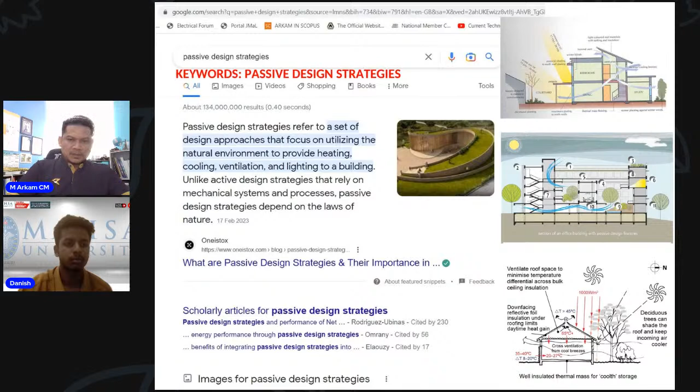So the keyword we want to talk about today is passive design strategies, and some of the pictures I've taken from Google search or Google Images are on the right hand side. I'll try to explain a little bit about passive design strategies so we understand what it's all about, in terms of building construction or building services, in our country and our climate especially.

And of course we talk about why first - why we want to go for passive design strategies. So passive design buildings use a lot of strategies to maximize energy efficiency. That is our main aim regarding passive design in terms of building, to maintain human comfort. So we'll talk about human comfort and how we want to use the nearest environment to the building to optimize the energy efficiency. That is the basic idea.

The key to the strategy is to maximize the energy that is gained and minimize the energy that is lost. So we want to maximize whatever useful energy comes from the immediate environment. When we talk about the immediate environment, we know the building - we have the building envelope.

Building envelope is actually the skin of the buildings. We talk about walls, we talk about roof. Walls and roof is considered as building envelope. So whatever is outside the envelope, we consider as the nearest environment. That nearest environment sometimes, and most of the time actually, has a lot of opportunity for us to maximize whatever can be beneficial for us inside the building. At the same time, we want to minimize the loss.

Bear in mind that in our climate in Malaysia, or tropical climate, we are blessed with a lot of sun radiation or solar radiation. We have been constructing buildings considering how the solar radiation and solar illuminance can be very useful for us inside the building. So it can be also part of the consideration.

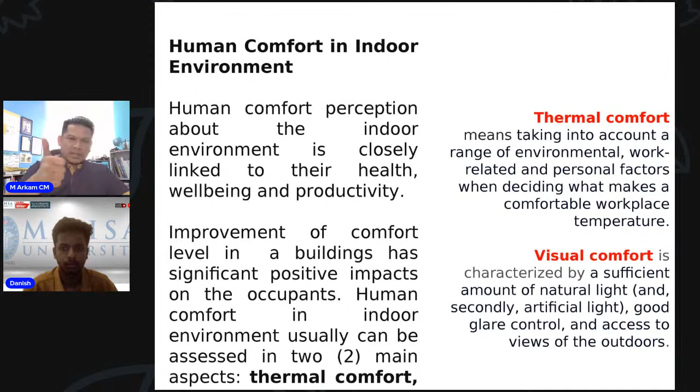Basically, sun is the main factor here. When talking about human comfort for indoor environment, sun plays a very important role for us to utilize whatever is useful from the outside environment, such as useful light and useful temperature, to be brought inside the building. This is quite complicated, but it's very true.

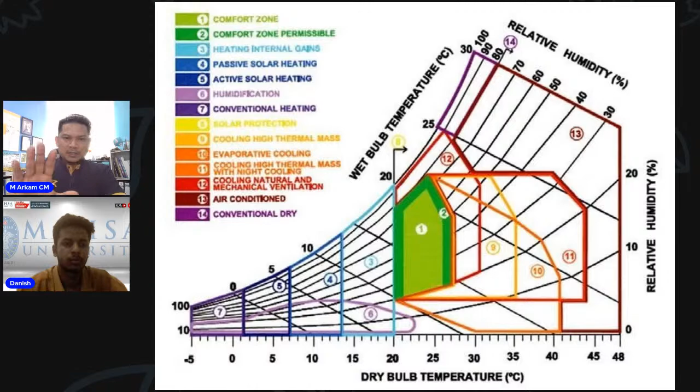So we're talking about zone one - that is the aim of every design, building, or place you want to go for, number one in terms of comfort zone and comfort level. Many scholars have researched to come up with this chart to help us understand the comfort level we're talking about regarding thermal comfort.

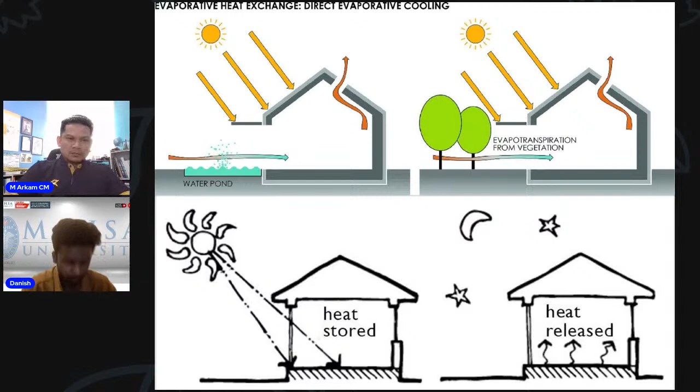But something needs to be done to improve this, in terms of maybe insulation, maybe passive design strategies, to prevent the heat stored in our building materials, and we need to choose our building materials with specifications so they don't absorb the heat to be released back during the night.

So one of the advantages of having vegetation at the right positioning, because we need to understand the sun path as well. So we'll talk about sun path later in this presentation today.

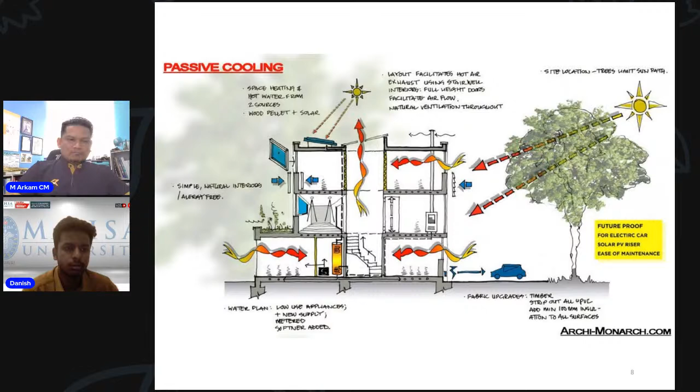So this also needs to be protected. You can go for, for example, tinted glass. Maybe you can go for other things, blinds or whatever can minimize the impact of the solar glare. But you need the useful light. So, for example, at my back here, there's actually a window. So my working space is quite bright. I don't have to switch on my lamp to use the space over here.

So what we need to do is actually to differentiate, just take the useful light, because light also comes with heat. So we need to understand how to remove the heat from the useful light so that the useful light will be here and the heat will stay outside. We don't bring the heat in. That can be done by a few passive building strategies as well.

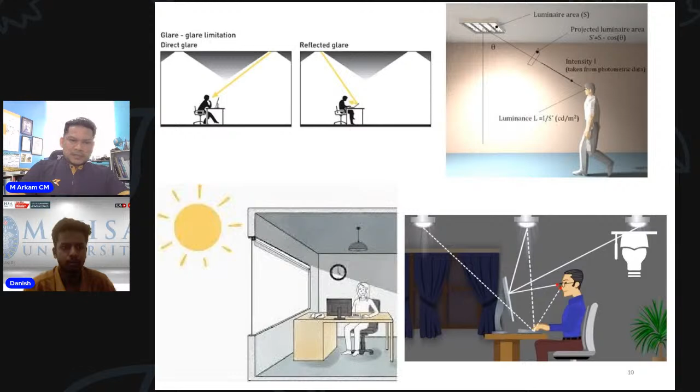They want to go for visual comfort, either using the sun or using artificial lights. Okay, in the book again, the recommendations for good practice in renewable energy application are classified under the following areas. So we want to maximize passive solar design. We want to design our building passively and maximize it, and we can do this through this standard.

Secondly, to optimize passive cooling strategies. So solar design must be maximized, and we optimize passive cooling strategies on how we want to cool our indoor environment by using less energy, especially electrical energy. Optimizing environmental cooling, such as vegetation, site planning, landscaping, and also shading. It can be done by optimizing environmental cooling from trees and vegetation, or how you plan your site, or by putting in landscape or shade.

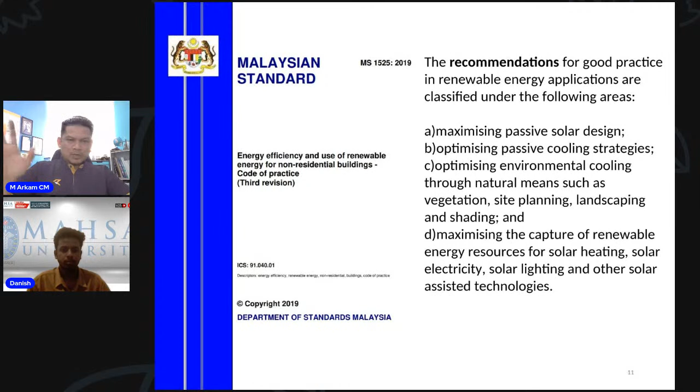So this is all about passive strategies, where a passive strategy in general doesn't need any mechanical or electrical effort to make it work. It can be one of the strategies we implement from the beginning when we construct the building. Maximize the capture of renewable energy. We won't talk about renewable energy today, such as solar heating, solar electricity, solar lighting and whatnot, because it is another topic for this webinar.

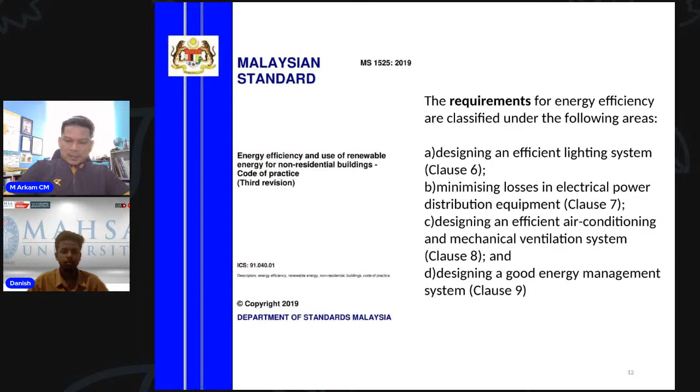Okay, then the requirements. Energy efficiency is classified under the following areas: design an efficient lighting system, which is about artificial light; minimize loss in electrical power, which we won't talk about either; design efficient air conditioning and mechanical ventilation; and design a good energy management system, which is more complicated. We want to integrate everything inside the building using an energy management system, which is available in the market now, but it's more complicated for us. We just want to talk about the sustainable design approach today.

So when we talk about architectural and passive design strategies, we want to design within the contextual climate. Contextual climate refers to your position. We need to understand our position here in Malaysia, equatorial, Kuala Lumpur, for example. It's a very specific area. And the site is the first step to optimize the benefit. So first, we need to understand our own climate here in our location. When we want to construct our own space or buildings, this becomes the main important thing: where is your contextual climate?

Provided by the specific environment. Specific environment here means, of course, vegetated areas; a lot of trees will make it different. Building a house in the woods will be different from building a house in the concrete woods, for example. Design solutions shall strive to achieve energy efficiency and use environmentally friendly materials of high quality and durability in order to decrease waste, meaning energy waste. This second paragraph is important.

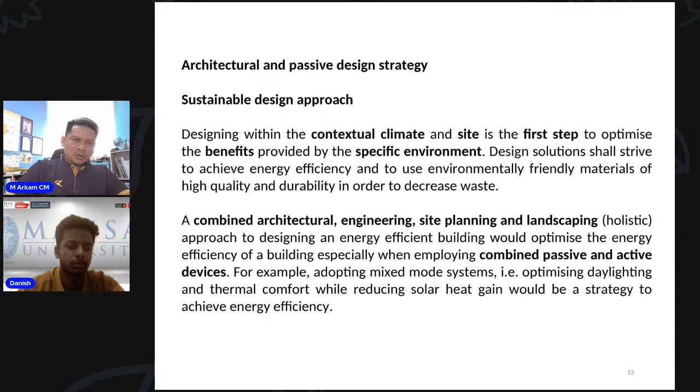The specific passive design strategies can be done by understanding the combination of those to be adopted in our project or building. Okay, this is too long. I'll go straight to points A to G there. For architectural passive design considerations, we need to consider the following. The first one, site planning and orientation.

How we want to plan the position of our building, if possible. If possible, if you want to construct a new building, of course, you have that luxury. If it's an existing building, you cannot do any other orientation; it's actually fixed there. But something can be improved or can be adopted: daylighting, facade design, natural ventilation, thermal insulation, strategic landscape, and RE, renewable energy, if possible. But again, I will not talk about the RE now.

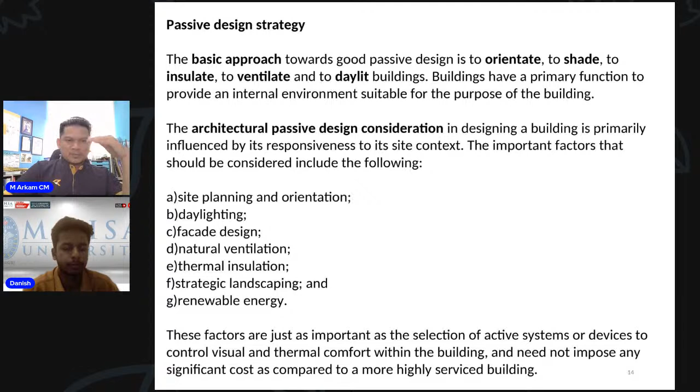These factors are just important, the selection of active system or devices. So we want to select the active system of devices to control visual and thermal comfort we were just talking about, and need not impose any significant cost compared to more highly serviced buildings. So A to F is very important for passive design. We talked about site planning up to the strategic landscaping just now.

Okay, this one is very, very important. Sun path in our area. Latitude 3.2 degree north, longitude 101.7 degree east. So this is actually the sun path where the sun is coming from the east. So it's north, east, west, and also south. Oh, sorry. Start from January. January, February, March, April, May, June, July, going to this direction. July, August, September, October, November, December.

So our sun is actually not coming from the exact same point every day. We need to know this very, very well. That is why our shadow is different based on the sun positioning, and the sun positioning is fixed through this kind of path. So coming from, for example, January here, go to here.

This is the way. Can you see my cursor, Danish? You can see my cursor, huh? Sir, I cannot see your cursor, sir. Can you see the cursor? So just the bottom one, the January one. I'm not sure how to help you on this. Let me see. How to put my cursor there? I cannot. Just to this January, 1st January in the bottom right there. Okay, right there, sir.

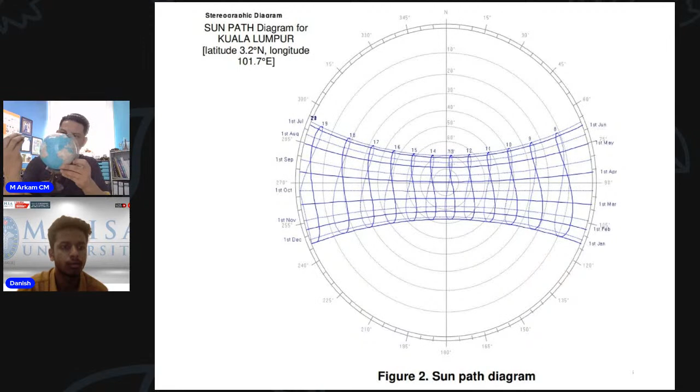Oh yeah, I got something to show you. I got my globe in my office. Okay, here. So the sun positioning is actually not here. It's something like coming from here, and then it comes a little bit up, and coming back. So then it can be low again, up and down, up and down. So it actually happens in our climate, in tropical climate. We are at the equator, so our sun is just on top of our sky. So that is where we can find our equinox, 2 times per year.

So that is where we can find equinox, where the sun is precisely on top here. Center of the cross. You can see the cross on that globe. So the cross will be our exact point where the equinox happened. And the equinox happened last month. That is why we were talking about heat stroke the last few days, and there is no more heat stroke coming because the season is over now. It comes back somewhere in September. So there is no point to talk about heat stroke anymore, because it's overtaken by events. But it's very important to understand how it can affect our lifestyle as well.

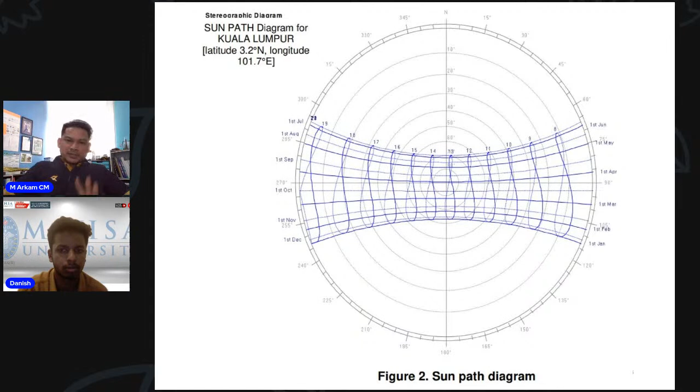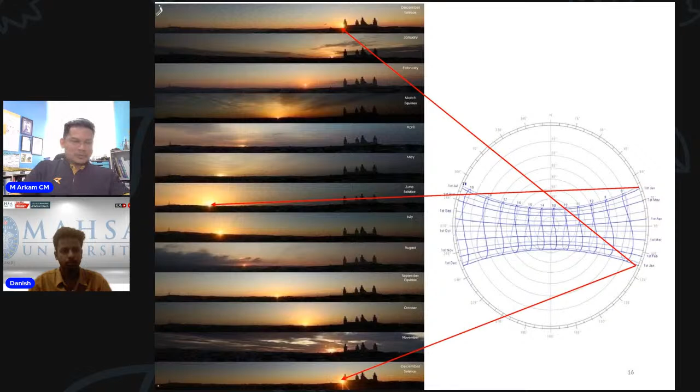We don't notice. Except if you like this topic, you will somehow notice lah. But you don't care. We don't notice actually. It's actually a blessed day for us to get everyday sun. Up to now lah, we don't have that.

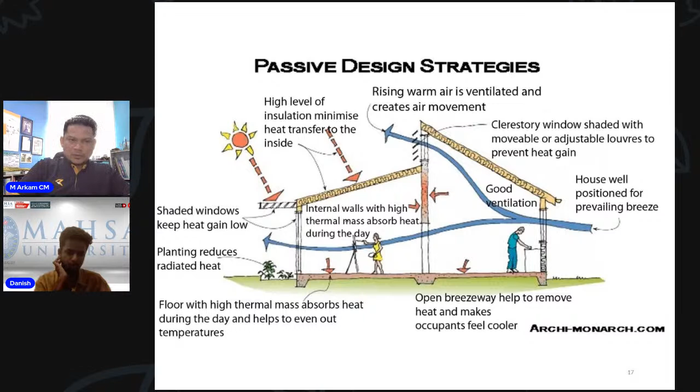And the top right there, we have January. Sorry, not January, June, where the sun is positioning far to the northeast. So far to the southeast and northeast. So all east lah, but north or south only. So this is how the positioning of the sun was created by our creator. And the passive design strategy, again talking about good ventilation and the sun movement, you know how to utilize the sun positioning for your building requirement. So we go fast, about 17 slides just now.

Okay, so we talk about local Malaysia. This is our sun path. But when we want to go to other countries, for example New Zealand over here, the sun path is different. The sun path is on the north side. They can see the sun on the north side. Meanwhile, in the UK, we can see the sun on the south side. So they don't have it above our position.

So that is why in the northern hemisphere, in the UK and Europe, all solar panels face 60 degrees to the south. And that is the most common reference that we had in the book before we started our own project on solar power plants. 60 degrees to the south, because we are referring to the UK. They're facing south because the sun is positioned to the south. In the southern hemisphere, for example in New Zealand, the sun is positioned in the north, so they're facing 60 degrees to the north.

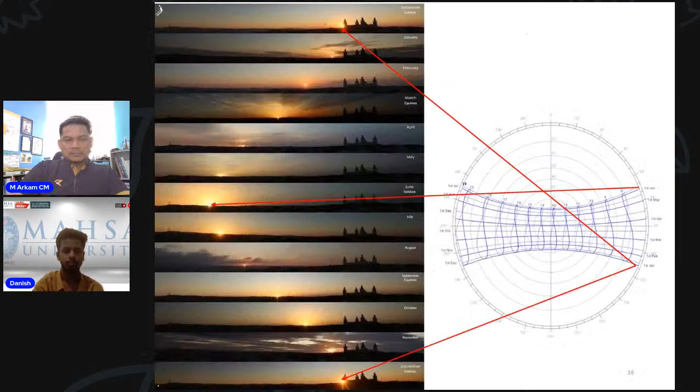So it's more appropriate for you to design according to the position of the building where you want to construct. So this is the fundamental concept when we talk about site planning and also building orientation. So this is much related. When we understand this, we can do our own building orientation based on the actual sun position, which is more beneficial for our building to optimize the sun's power lah.

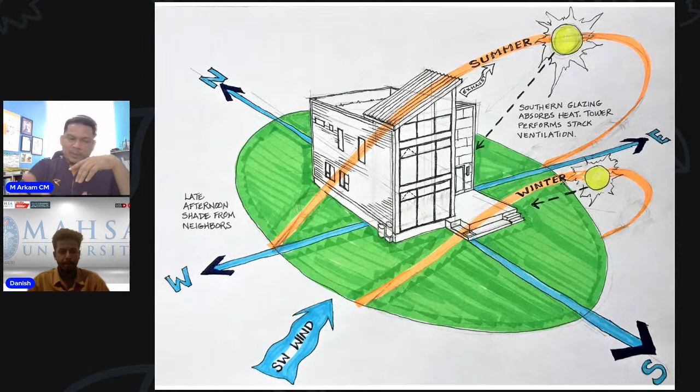Okay, when we talk about the sun, we talk about two things. First one is the heat. Second one is actually the intensity of the light. The intensity of the light translates into the lux level, the illuminance level, so that we can have visual comfort. And heat actually goes to thermal comfort, where we get the temperature up or down. It's actually the same terms, temperature as heat, as high or low.

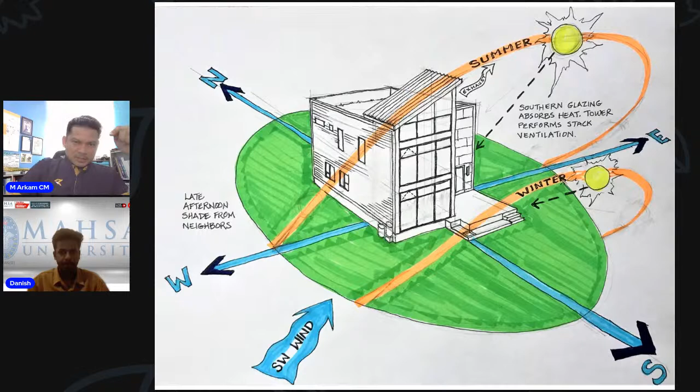So that is why the wind turbine is more beneficial for countries in the northern hemisphere, such as the UK, Germany, or even France, because they have a nice, continuous, consistent, one-directional wind flow. It's very important to design the wind turbine according to the wind direction. We cannot do this in our climate, because we can get wind from either south or north. We are in the middle and don't have that luxury to tap wind energy as our source of energy, even though we are so keen to do so.

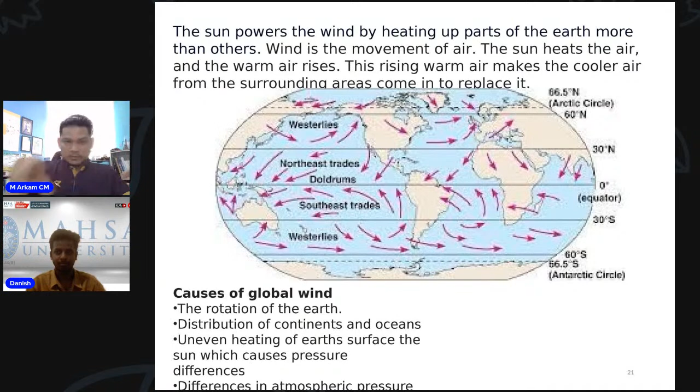And understanding the wind direction, you can put your building accordingly to the position where the wind should flow. We could understand the wind direction if we had this kind of luxury in terms of global wind flow, but we cannot get it. So the best that we know, the wind direction should be here. Then we try to understand the local contextual climate, where we can go for a directional wind, so that the wind comes into our building from one opening and goes out from another opening.

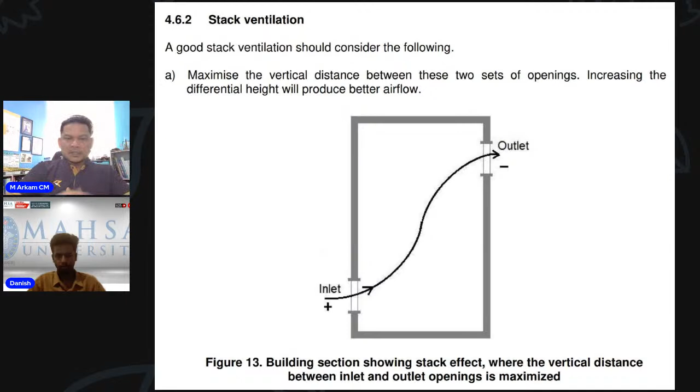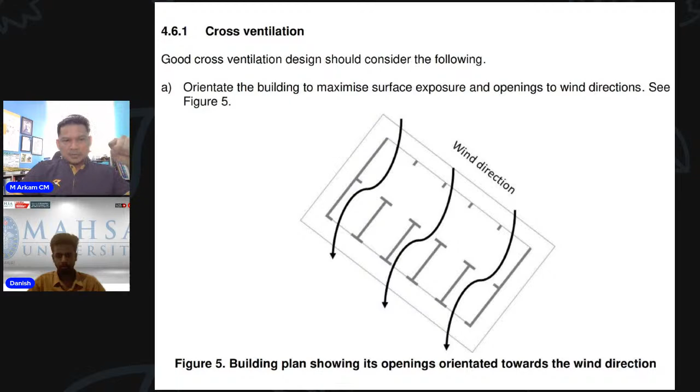This is cross ventilation, and one more is the stack ventilation, coming from the bottom, going up and releasing to the environment through the second outlet of the same building. So this is the Bernoulli principle here, the hydraulics here, as well as heat transfer. In terms of engineering fundamentals there are a lot of things to be discussed, but we just use building science to understand how to position our building correctly for our construction.

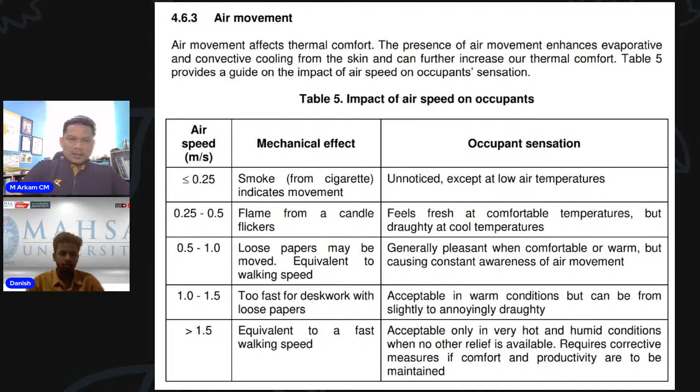Right? Okay, air movement. I think I need to skip that. It's just telling about airspeed 0.25 and below, and the sensation we get up to 1.5 and above. So this is how to understand air movement so that we can position our opening precisely in the area where we want it to function, or else it won't function. You will put a passive device or passive strategy, but it won't function in our climate due to a misunderstanding of the mechanical effect of wind movement.

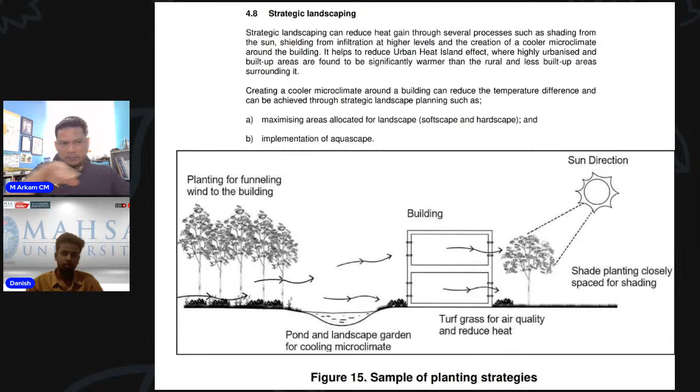So that is where the wind will flow from one point to another, coming through our house or building, just to get the airflow constantly to improve our thermal comfort. Knowing the direction of wind circulation and the sun path at a specific location, we design within the contextual climate. Site is the first step to optimize the benefit of providing the specific environment.

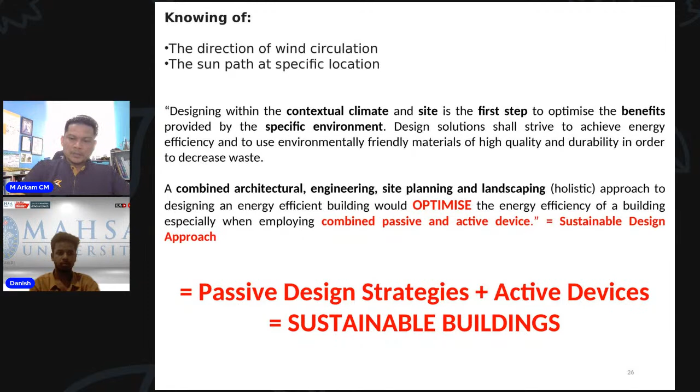So combined architecture, engineering, site planning, and landscaping would optimize the energy efficiency in the building. Combine passive and active devices, and that's actually sustainable design, where you understand everything about the environmental impact of your building and then come back to your passive devices to add in together, so they function as one teamwork between passive and active design strategies. So passive design strategy plus active devices means sustainable building will surface due to these strategies.

Some of the strategies use the light shelf or skylight, but be careful - by using skylight, basically you also invite the heat to come in. So there must be a strategy on how to remove the unwanted heat from the lights, from the useful lights.

There's a lot of strategy that can be imposed. One of them, we can put two layers of glass, and you can also put a glazer or no glazer - I mean a reflector - just to minimize the impact of direct skylight. But it can be designed, it can be done.

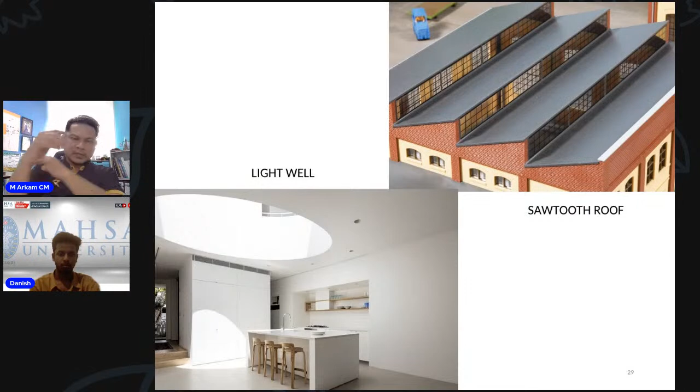Like the sawtooth roof - this is not important or popular in our climate because it's facing one direction. It's basically designed for the north hemisphere, where they're facing south, and in the south hemisphere they're facing north. Regarding that sun path we've been talking about just now, this is also one of the approaches.

Roof monitor is very popular here in Malaysia. Atrium is also very popular here in Malaysia. So it's just to understand the positioning of the sun and where to put our atrium to optimize the light illuminance from the sun to be useful in the indoor building. So it can be designed, it can be simulated as well.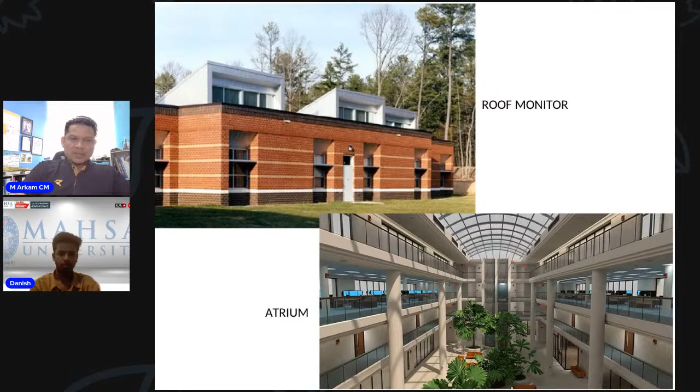It can be done in terms of a lot of materials being available now for you to choose your sustainable design approach. This is quite common.

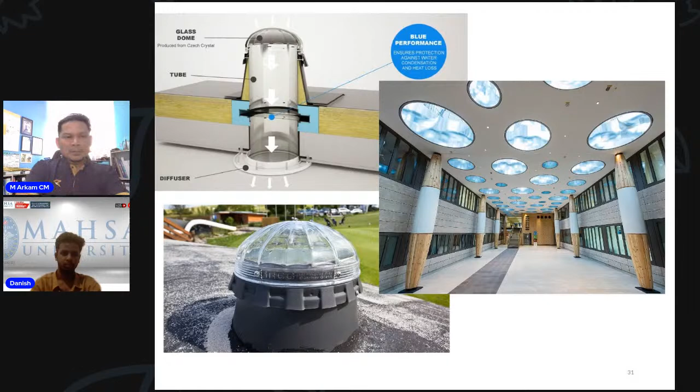We can see the light tube, for example, coming from the top and straight to the interior of the building using aluminum reflectors inside. This is where the tube collects the lights from the sun, pushing them towards the diffuser inside the building, with some limitations as well, but it's also workable in some areas. This is how a solar tube works - from the top, getting the solar light, and then the light is bounced inside this aluminum reflector and comes out directly from the sky.

This is to illuminate the area where you don't require to open up or switch on your artificial lights. So it can be useful when we talk about passive design or passive lighting systems. This is more complex - solar lighting, the Himawari system, regarding solar fiber optic daylighting.

This is the grid interactive efficient building where we can put everything in our building. Starting from solar storage, lighting controls, window shading, efficient windows and walls, EV charging for car transportation, building energy management system, zoning control, energy information, smart meter, utility power, smart thermostat to control our internal temperature, and plug load control. This can be done - this is part of the active devices that we can implement in our building besides the passive strategies discussed before.

So this is all passive and active devices, except for the efficient windows and walls. Other than that, everything else is active.

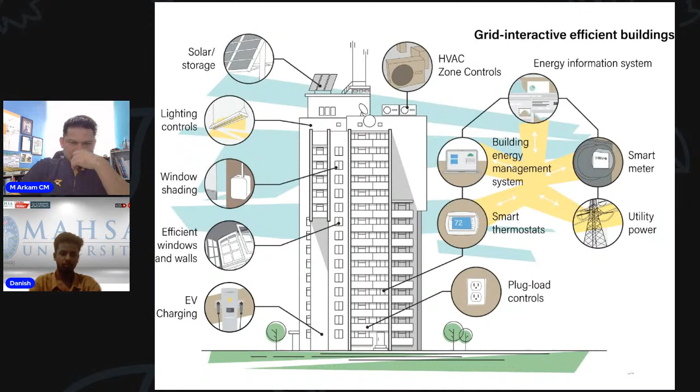So I think that's it for 45 minutes. Danish, is there anything to add on? Yes sir, for now... no, nothing to add on.

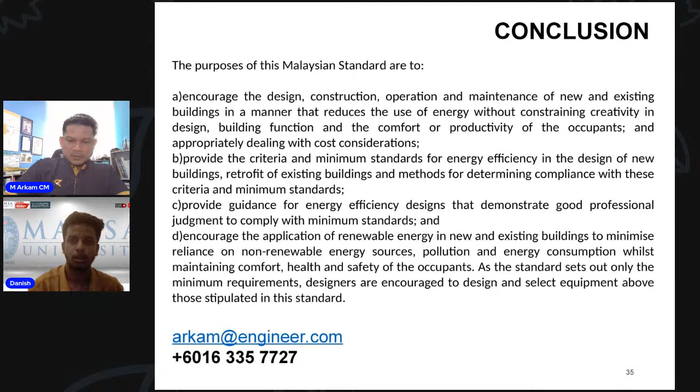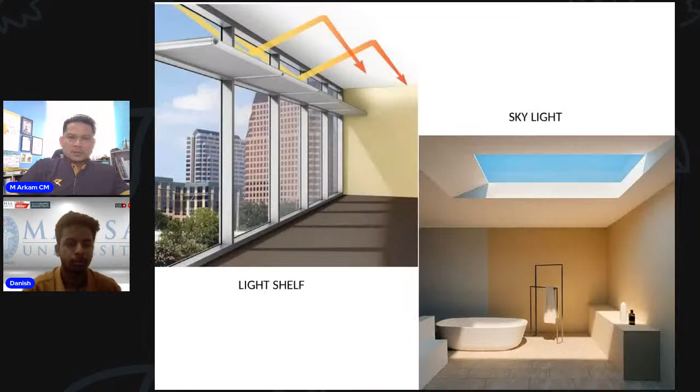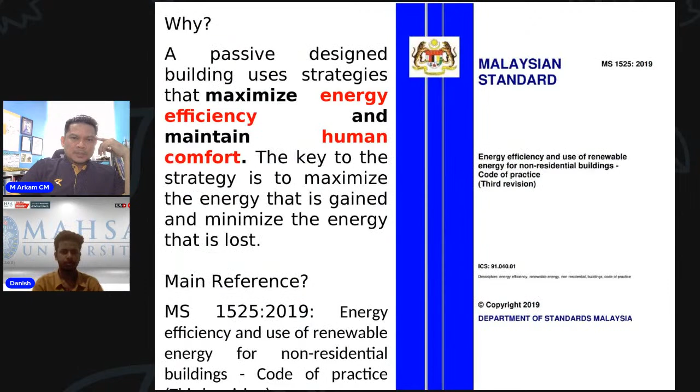Okay, thank you. My email and phone number are there. The slide has also been shared with your lecturer just now, so it can be downloaded and used for your reading. So this is what we can share on passive design strategies regarding building energy efficiency optimization through passive design strategies. Back to you, Danish. Thank you, sir, for sharing.

But sir, I have one question regarding solar energy. Yes, please. Let's say we are building a building - can we depend on solar energy for that building without any outsource, like for electrical and energy consumption? Can we just depend on solar energy?

Maybe you try to talk about net zero energy, net zero building. A net zero building is considered as a building that doesn't require any electrical supplies for them to function. Actually, there was research on this kind of topic. In fact, actual buildings have also been developed for showcase. It may not be straight to net zero, but highly efficient buildings. When we talk about highly efficient buildings, there are parameters to show in terms of per person per meter square - how much the building uses energy for each person for each meter square. Up to that, we name it the building energy intensity.